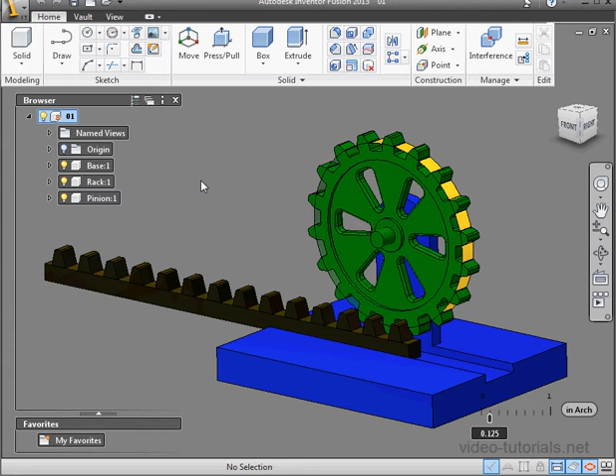We're still working with Fusion's Manage tools, and in this tutorial, I'll be showing you how to use the Interference tool. In my graphic area, I've got a rack and pinion assembly. The Interference tool is on the Manage panel. Let's left-click to activate it.

The first step is to select the components that we'd like to analyze. We can also include coincident faces if we want. Just check here to activate that option. And when you're done your selections, click Compute. Here are the interference results.

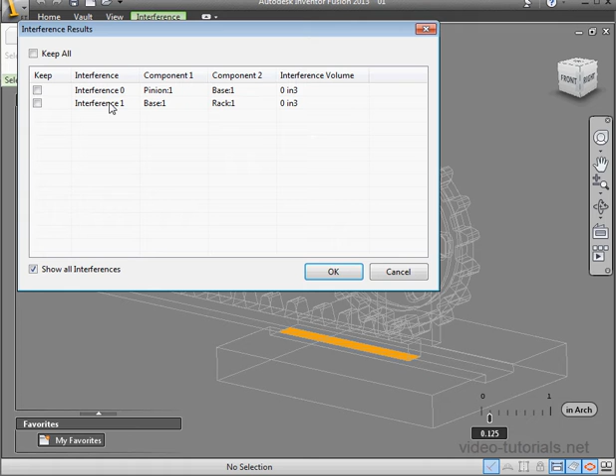I see interference 0 and interference 1. The volume of the interference is actually 0, so basically here we have coincident faces. There is no interference. If I try to keep these interferences as separate components, I can't because they don't have any volume. Let's cancel out of this window and let's create some interferences and then we'll run this analysis again.

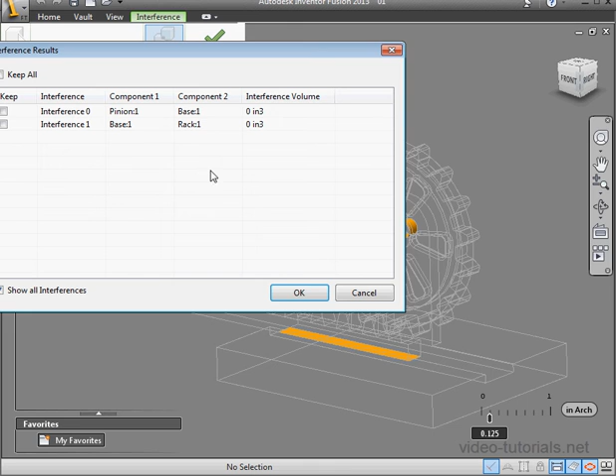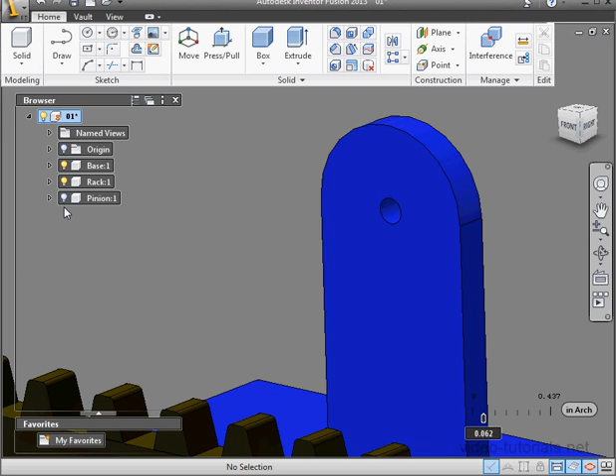First, let me hide the pinion. Just zoom in a bit. Let's apply press-pull to this face here. Let's make it 0.075 and click OK. And we're done. Now let's bring the pinion back in and run the interference tool again.

I select the entities I'd like to analyze, the pinion and the base. This time I'll uncheck Include Coincident Faces and click Compute. And here is the obvious interference. It's marked in red in the graphic area.

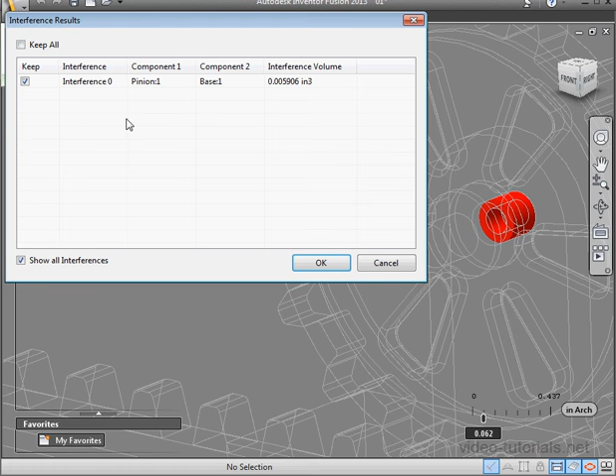The volume of the interference is about 0.006. That IN3 means cubic inches. Let's check Keep and then click OK. Let me hide the pinion again.

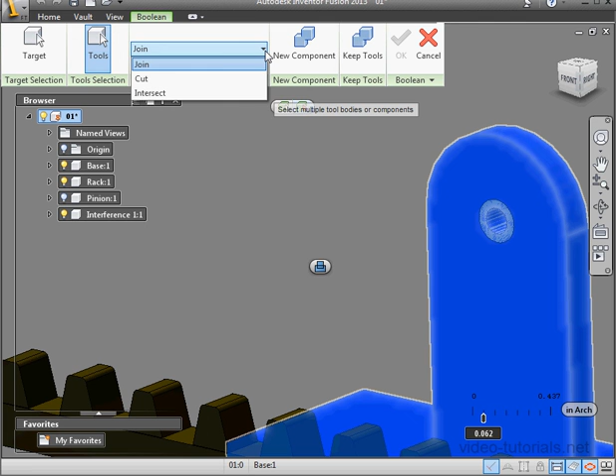Since our interference is now a separate component, we're able to run a Boolean operation on it to cut it out. So let's activate the Boolean tool. The target will be the base. And cut is our operation, so let's change that. The tool will be the interference. If Keep Tools is active, unselect it, and then click OK.

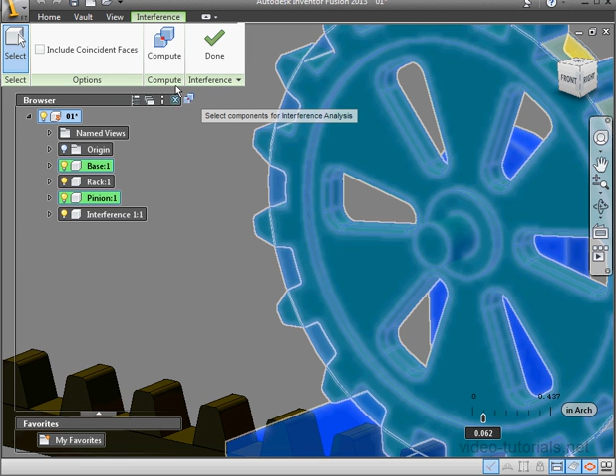Now let's bring up the pinion, and we'll run the interference tool again. Select the base and the pinion, and click Compute. No interferences are detected. Let's click OK and Done. And this concludes our tutorial about using the Interference tool in Inventor Fusion.